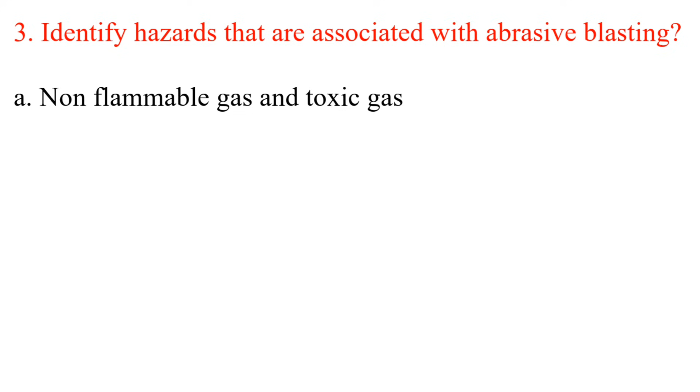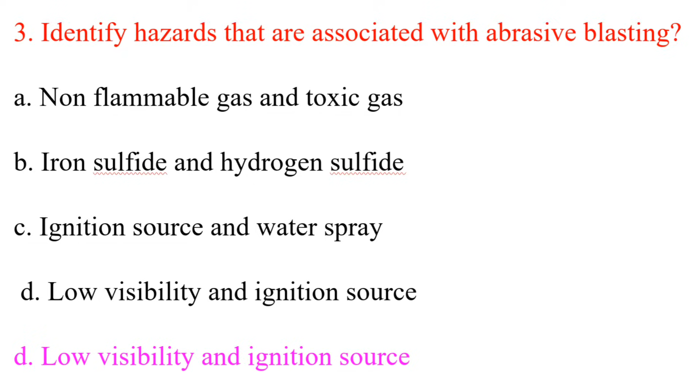Question 3. Identify hazards that are associated with abrasive blasting. A. Non-flammable gas and toxic gas. B. Iron sulfide and hydrogen sulfide. C. Ignition source and water spray. D. Low visibility and ignition source. Answer: D. Low visibility and ignition source.

Question 4. Who will install lock and tag while working on electrical equipment? A. Electrical engineer. B. Issuer and receiver. C. Designated representative. D. Receiver and supervisor. Answer: B. Issuer and receiver.

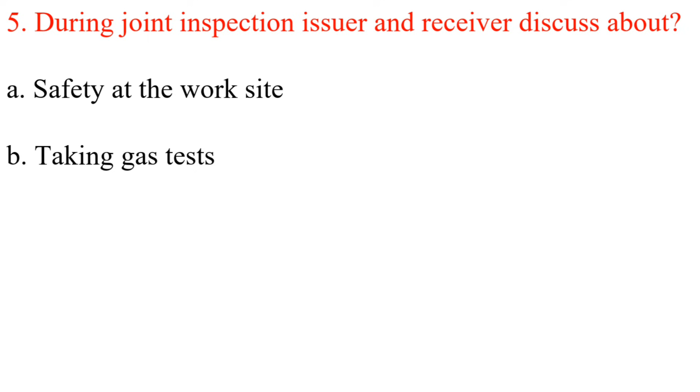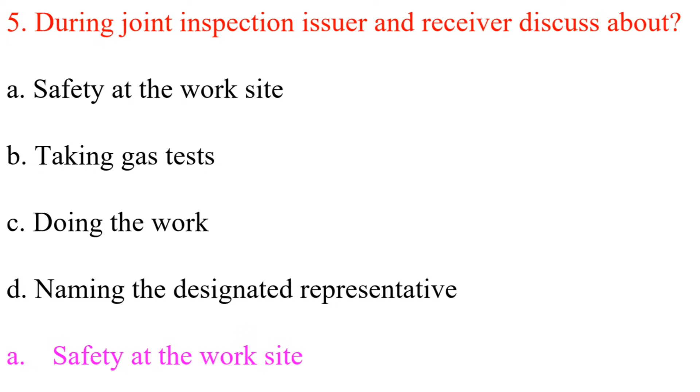Question 5. During joint inspection, issuer and receiver discuss about: A. Safety at the work site. B. Taking gas tests. C. Doing the work. D. Naming the designated representative. Answer: A. Safety at the work site.

Question 6. Who will stay at site after open flame work? A. Standby man. B. Receiver. C. Issuer. D. Fire watch. Answer: D. Fire watch.

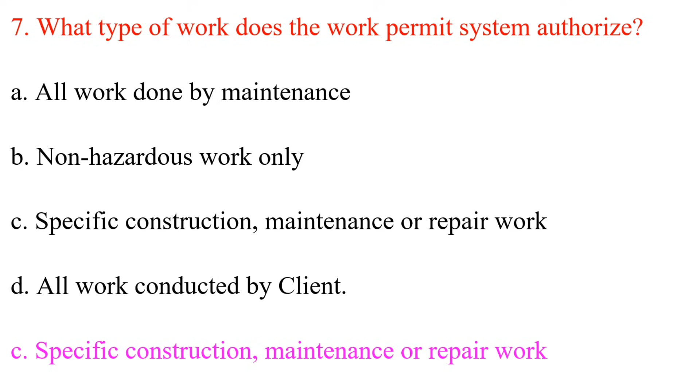Question 7. What type of work does the work permit system authorize? A. All work done by maintenance. B. Non-hazardous work only. C. Specific construction, maintenance or repair work. D. All work conducted by client. Answer: C. Specific construction, maintenance or repair work.

Question 8. Who will lead the JSA and fill the hazard analysis checklist? A. Issuer and receiver. B. Supervisor. C. Designated representative. D. Issuer. Answer: D. Issuer.

Question 9. Who is a permit receiver? A. A person nominated by his supervisor. B. A qualified Saudi Aramco employee. C. A person certified to receive permits. D. A maintenance or contract worker. Answer: C. A person certified to receive permits.

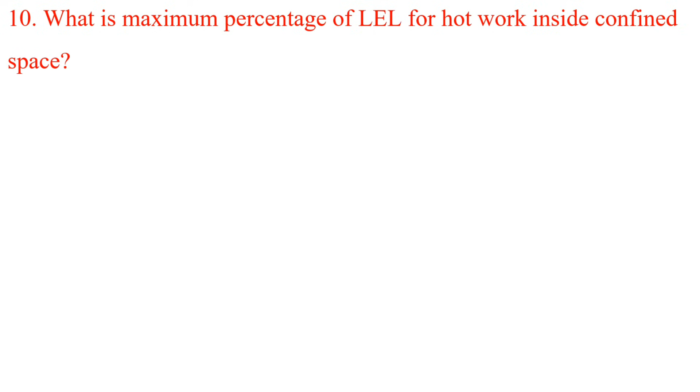Question 10. What is the maximum percentage of LEL for hot work inside a confined space? A. 10%. B. 5%. C. 0%. D. 2.5%. Answer: C. 0%.

Question 11. The work permit issuer is responsible for: A. Equipment or a work area. B. Extending certificates. C. Complete job on time. D. Nothing once he issues a permit. Answer: A. Equipment or a work area.

Question 12. Should the receiver sign a work permit if the permit does not address all of his safety concerns? A. No. B. Yes. C. Only if issuer requests. D. Only if it is a rush job. Answer: A. No.

Question 13. Why is spray painting in a confined space more hazardous than in open space? A. Paint can build up on the inside confined space. B. Flammable vapors can create explosion. C. Dust can cause paint not to dry properly. D. Paint cans can trip and injure workers. Answer: B. Flammable vapors can create explosion.

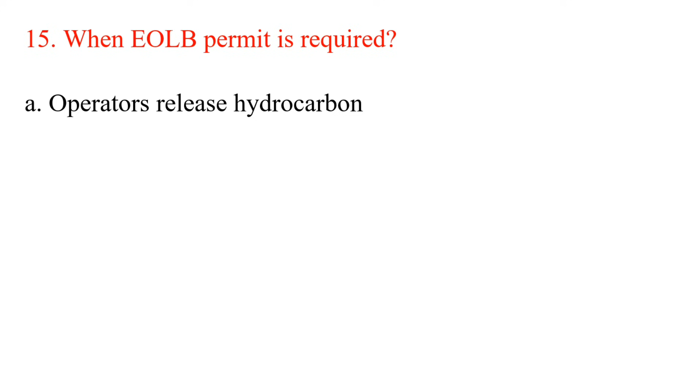Question 15. When is an EOLB permit required? A. Operators release hydrocarbon. B. Flange opening of pipeline. C. Craftsman build scaffold. D. Operators drained equipment. Answer: B. Flange opening of pipeline.

Question 16. What does a restricted area require? A. That certificates are issued. B. That extensions are short-term. C. That receivers respond to emergencies. D. That work permits are issued.

Answer: D. That work permits are issued.

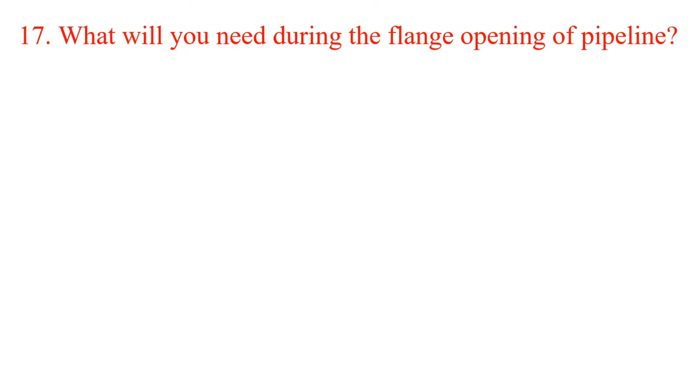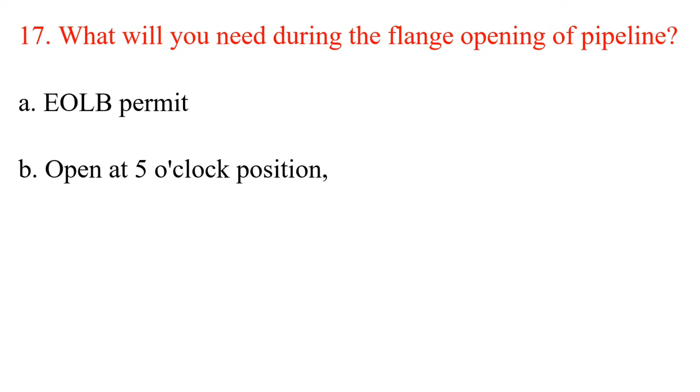Question 17. What will you need during the flange opening of pipeline? A. EOLB permit. B. Open at 5 o'clock position. C. Check wind direction. D. All.

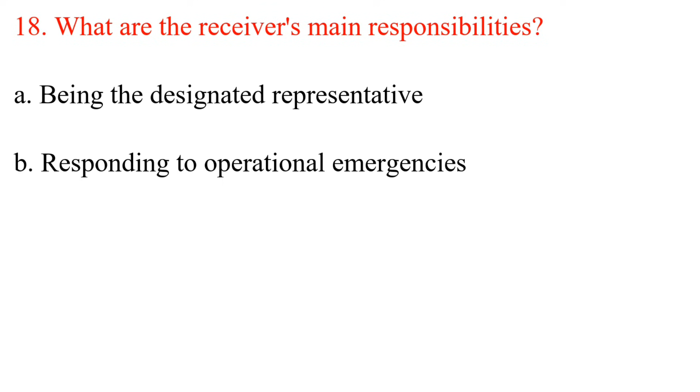Answer: D. All. Question 18. What are the receiver's main responsibilities? A. Being the designated representative. B. Responding to operational emergencies. C. Comply with safety precautions and signing the permit. D. Filling the work permit and take gas test.

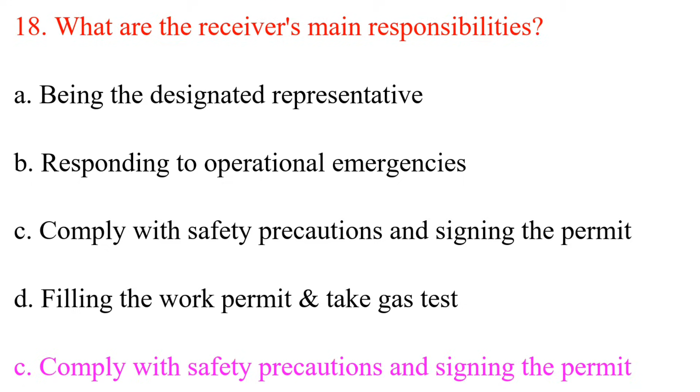Answer: C. Comply with safety precautions and signing the permit.

Question 19. In case of emergency, which permit is required for firefighting? A. Hot work permit. B. Permit is not required. C. Need issuer approval. D. Cold work permit.

Answer: B. Permit is not required. Question 20. When will the issuer check to make sure equipment has been ready for work? A. After issuing the permit. B. After getting counter-signatures. C. When permit is closed. D. During the joint site inspection.

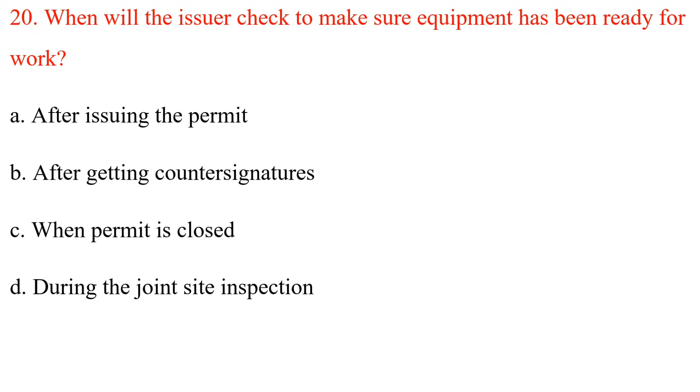Answer: D. During the joint site inspection. Question 21. Can work in two different locations be covered on one work permit? A. No. B. Yes. C. Only if receivers agree. D. Only with superintendent approval.

Answer: A. No. Question 22. The fire watch must know how to: A. Operate process equipment. B. Take gas tests. C. Operate fire equipments. D. Operate fire extinguisher only.

Answer: C. Operate fire equipments. Question 23. What type of permits is needed when opening a line of vessel? A. Cold and confined space. B. Hot and release. C. Hot and confined space. D. Cold and release.

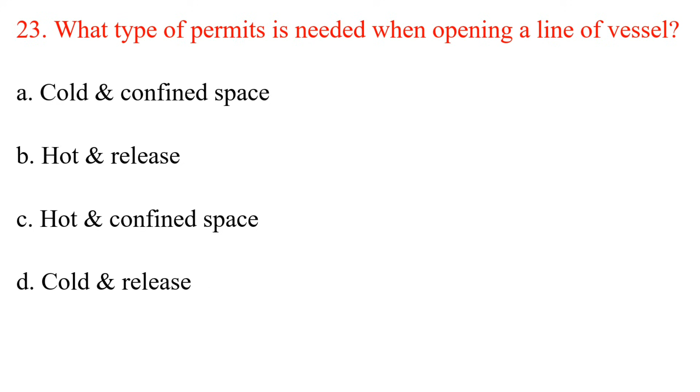Answer: D. Cold and release. Question 24. Who should be assigned when working near a combustible material? A. Flagman. B. Firewatch. C. Fireman. D. Standby man. Answer: B. Firewatch.

Question 25. During welding operation, where will your fire extinguisher be located? A. In welding machine. B. Downwind position. C. Near any equipment. D. Upwind position. Answer: D. Upwind position.

Question 26. Who should keep the work permit for a long time? A. Standby man. B. Receiver. C. Firewatch. D. Issuer. Answer: D. Issuer.

Question 27. When visual contact is not possible inside confined space, what are other means of communication? A. By voice. B. Hand signal. C. Rope communication. D. All the answer. Answer: C. Rope communication.

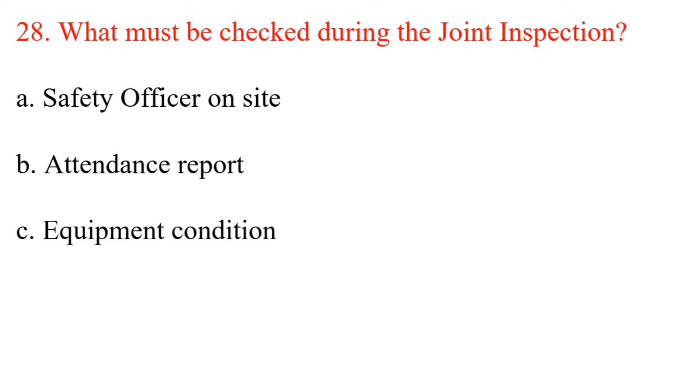Question 28. What must be checked during the joint inspection? A. Safety officer on site. B. Attendance report. C. Equipment condition. D. Toolbox talk. Answer: C. Equipment condition.

Question 29. What type of work permit for electrically operated X-ray? A. Cold permit. B. Release and hot permit. C. Confined permit. D. Hot permit. Answer: D. Hot permit.

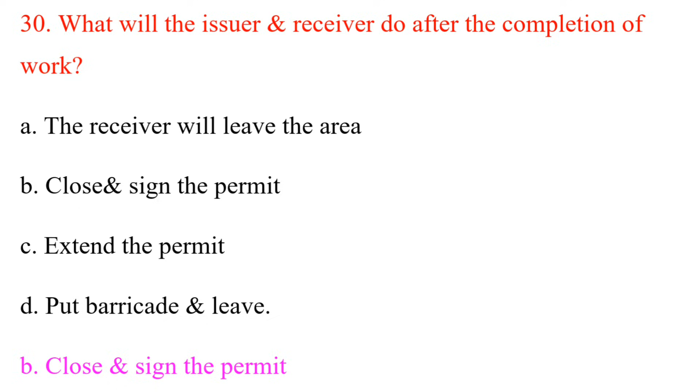Question 30. What will the issuer and receiver do after the completion of work? A. The receiver will leave the area. B. Close and sign the permit. C. Extend the permit. D. Put barricade and leave. Answer: B. Close and sign the permit.